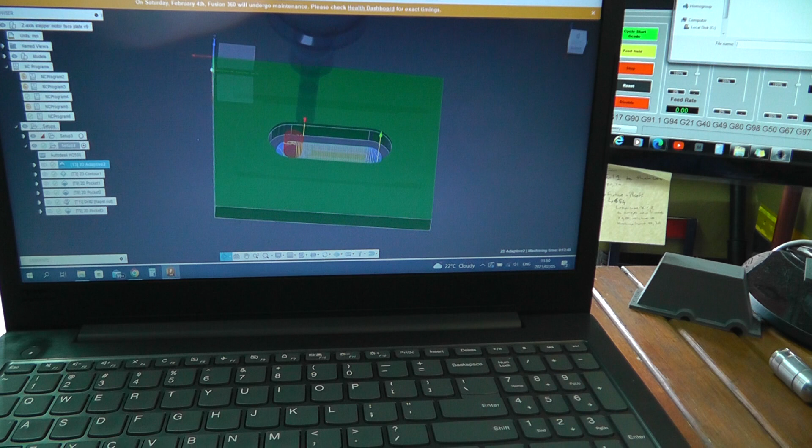Following on from my Mill CNC testing, this is a little design that I've done on Fusion 360 for a little stepper motor plate. Now had a dry run at drilling the slot for the stepper motor pulley hole.

I did a scratch pass on top of the plate with the machine just to see that it behaves properly. Everything worked fine, but I had about 23,000 lines of code. I was actually using a very light cut rate, so lots of code as a result. And then I was also a little worried that the feed rate was a bit high, so I've had a go at modifying all of that.

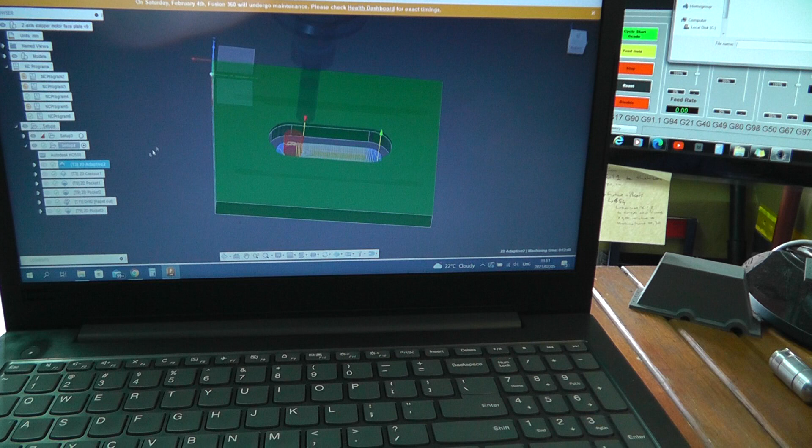So basically I've selected a 12mm aluminium flat end mill, limited my spindle speed to 1000 rpm. That's kind of where it's geared up at the moment. I need to address that and get a higher spindle speed rate at a later date. Cutting feed rate is 200 millimeters per minute.

So I've basically defined the workspace using the chain selection. I'm still learning, so basically I defined the area that the tool has to cut, and then the little arrow indicates whether it has to cut on the inside of that or outside of that.

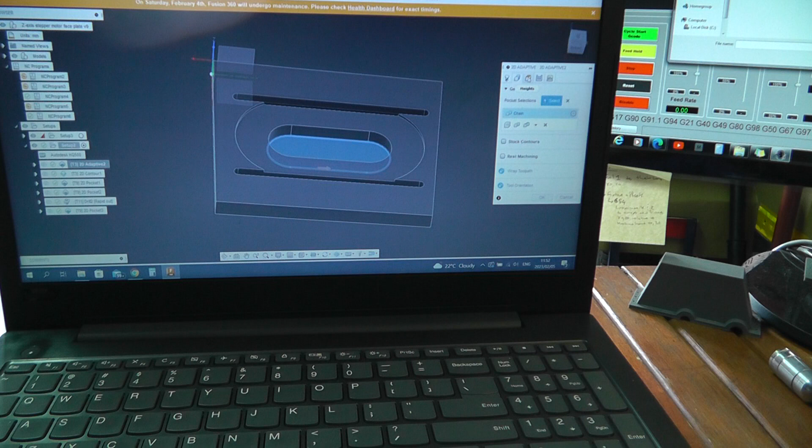And then the heights, I left it as standard. I just added the bottom one, which is the bottom piece. My vise is clear of the hole, and the slot's going to go right through the piece. It's a 12mm piece, so I think that will work.

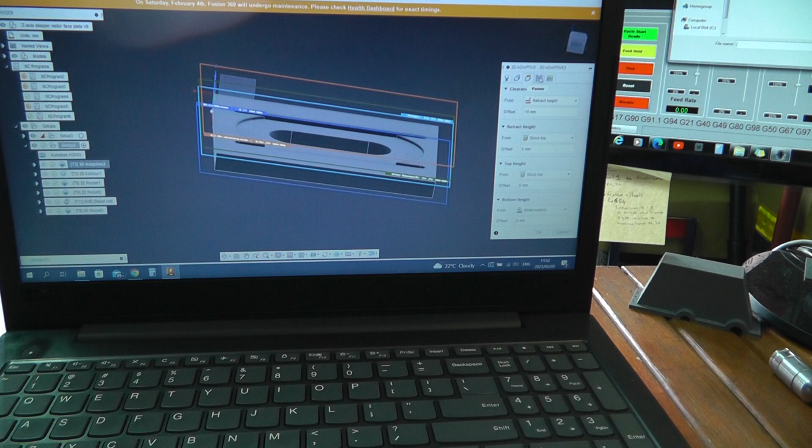Tolerance, okay, it's about the accuracy of the actual finish or the actual path it takes. I'm not too worried about that.

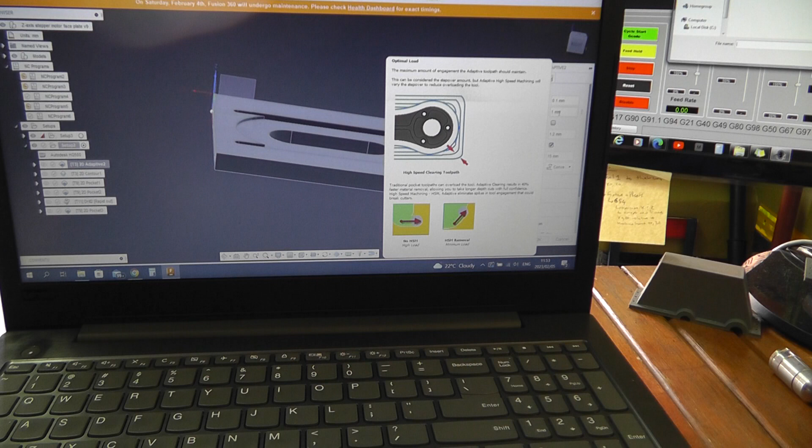Optimum load I'm busy playing with, to look at the depth of cut and adaptive clearing, although I believe the system automatically adjusts depending on whether it's cutting and the load on the blades. If it's cutting two sides at the same time, it will back off apparently. I'm not so sure how that works.

Slot clearing, I think that's basically to start a little pocket in the middle, and then instead of just plunging and helix spiraling up right to the edges of the slot, it basically creates a little hole, a little slot in the middle, and then uses long passes to do the finish.

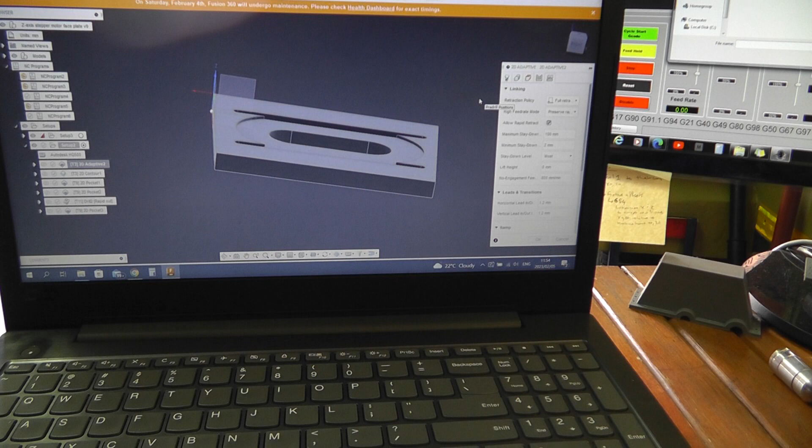Yeah, so I've limited that to 15mm. I've got a 12mm end mill, so that will allow it to helix a little bit up to 15, and then I want to see how it finishes off with the long linear moves along the sides. I haven't tried that yet, so I'm going for conventional just to play it safe. I think it's a safer way to cut, especially when you're still learning how this whole system works. So yeah, basically that's how I've set it up.

You can have a look at the actual simulation. So because I don't have my Z-axis, although my stepper motor is running, my Z-axis is obviously not done because this is the plate to secure the motor to the Z-axis.

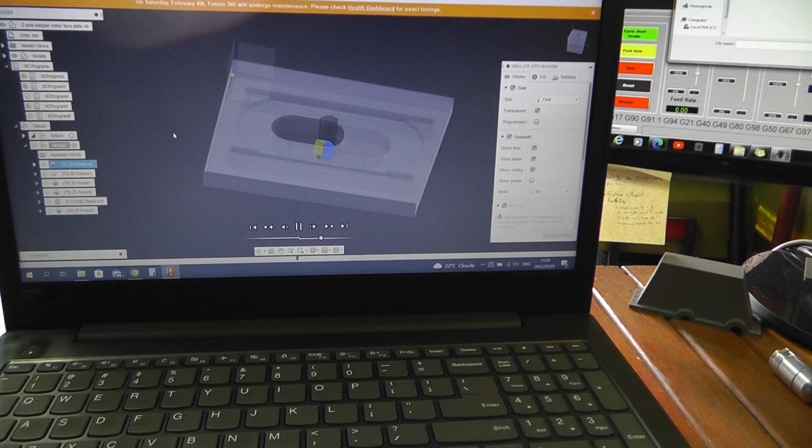But I'm going to manually plunge it to the bottom, and then I'm going to use a dwell function just to give me the time to manually plunge to the bottom, and then hopefully the cuts that you're seeing now are going to be done. There's no Z-axis function there, so I don't expect anything to go wrong.

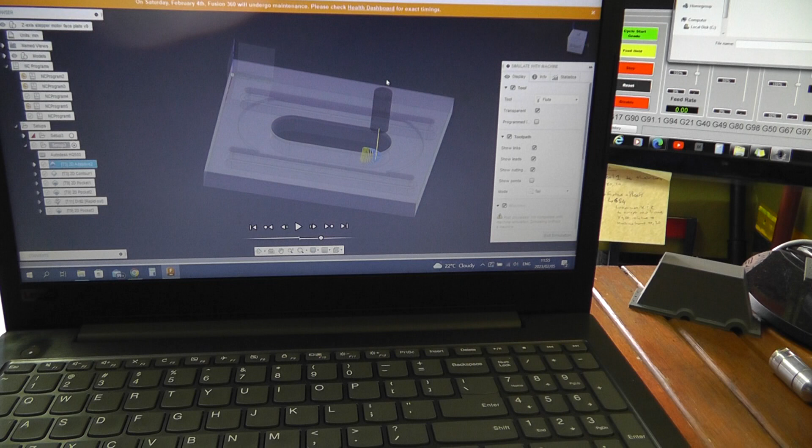And then I've set it up to just stop on the retract, so it doesn't try and go home, so it doesn't accidentally bump into the rest of the workpiece, because I don't have an automated Z-axis yet. So yeah, we'll come back just now and set the system up, and then let's see what happens.